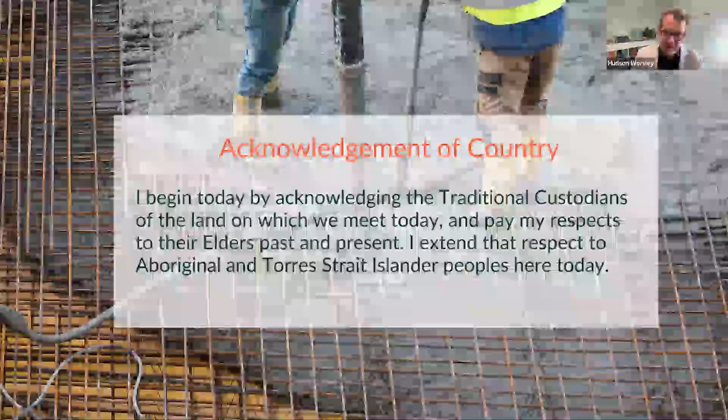And thank you to the 400 odd registrations who expressed interest in this. Clearly, this is a document that is being well received and will be read with great interest. As chair, our secretariat has already heard from the ACT government saying, hey, can we apply this tool? Can we use it? The Victorian government, their transport people, are also giving the thumbs up saying this is very timely, very useful, and there's a lot of interest from local government as well. So really thrilled that the MECLA collaborative model is delivering.

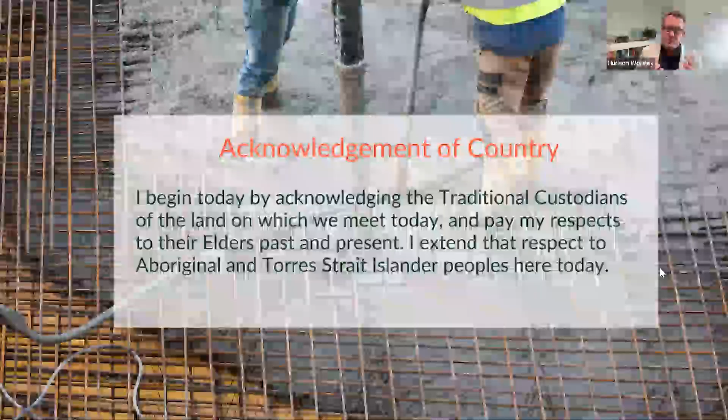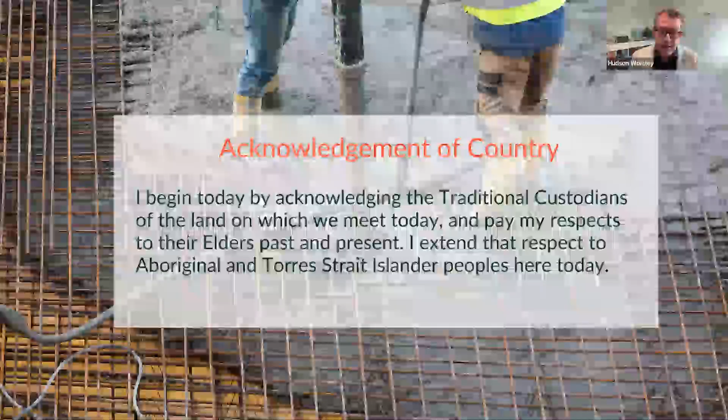Now, as always, MECLA operates in a pre-competitive space. The ACCC has recently put out a consultation paper talking about collaboration for sustainability. The key point being we mustn't engage in any anti-competitive behaviours. So I point that out at the start of every event. It's so important. But the common good, the public interest that we are seeking to achieve, I think is writ large here. So please keep that in mind.

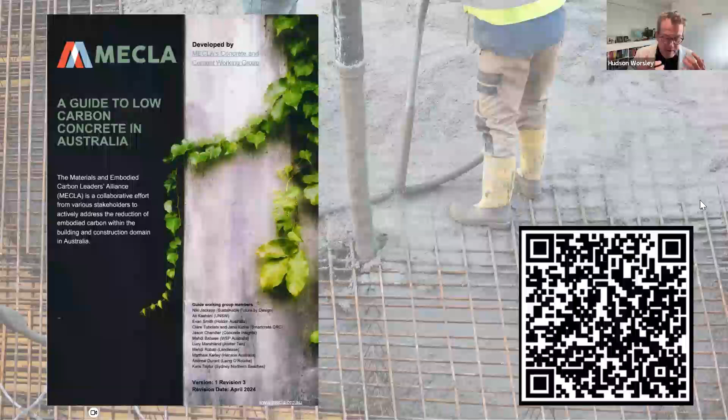We have Evan Smith, who will take us through the guide. He comes from a concrete supplier, but he's working with Ali Kashani, a researcher from UNSW. Nikki Jackson, I asked him how best to describe him. He just said, look, I'm a concrete dude. I'll let him explain that, but really he's a specialist consultant with a lot of industry experience. We have Claire Tubelet from the Smartcrete CRC, so talking industry collaboration there. And then Mehdi Robati from the contractor side, from Lendlease. So we have all parts of the value chain for this topic contributing to this fantastic paper.

Just before we go into it, I really want to zoom out a little bit on the context, and why we're having this conversation, why MECLA is here as well. So, the construction sector has a clear mandate. By 2050, we need to be carbon neutral. And by 2030, we need to have at least a 40% reduction in the embodied carbon of construction materials as well.

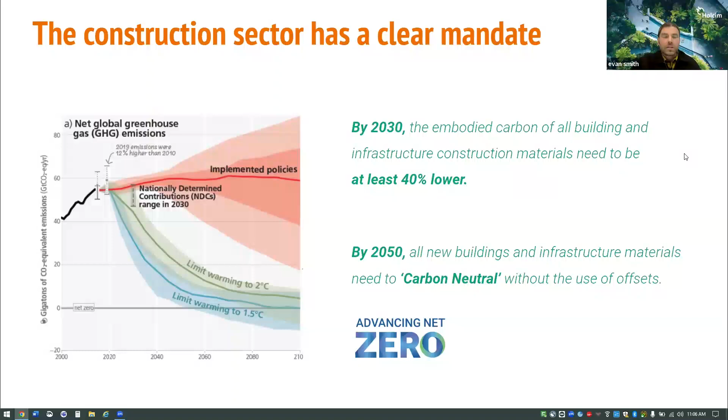So the primary emissions is from the cement. For a general cement, it might be 80 to 90% of the global warming emissions actually coming from that 11% as well. So you can use industrial byproducts and alternative materials to reduce that. So byproducts from power stations, so fly ash, byproducts from steelworks, slag, silica fume from silicon manufacturing as well. And there's a number of other SCMs that the industry is looking to use as well.

Gravel, the impact from the aggregates can be reduced by using recycled aggregates coming back from the construction demolition materials as well. Sand, natural sand can actually be replaced by manufactured sand. So it's a byproduct from the quarrying activity, some of the finer materials from crushing the coarse aggregates as well.

And also water. The environmental impact can be reduced with the water by actually using recycled water. So it's quite common practice as well that a lot of the concrete batching plants actually capture the wash water from hosing the yards and the trucks and the washout, and they actually reuse it into the concrete as well. So all those things can come together to reducing the embodied carbon of concrete.

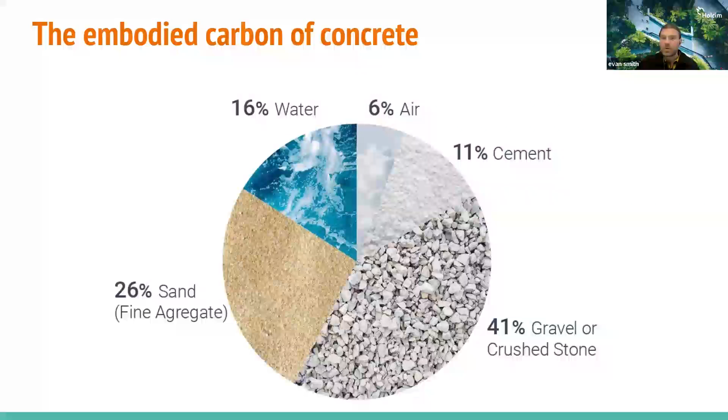So I guess why is it important to use a life cycle assessment? So life cycle assessments and environmental product declarations really look at the entire impact of a product as well. Like I like to say, all the way from it coming out of the ground through the extraction, like every single material that goes into the concrete that I showed you in the last slide, all the way through as it goes through to the life cycle of the product as well.

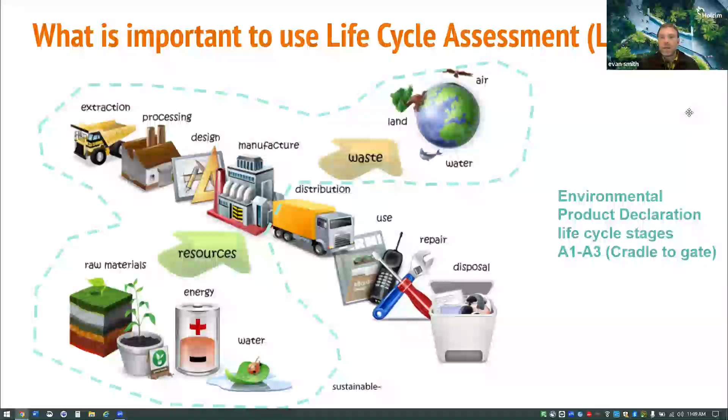So quite comprehensive. EPDs are done to international life cycle standard product category rules, and they're third-party verified, and they're all publicly available as well. So really the gold standard in life cycle assessment as well.

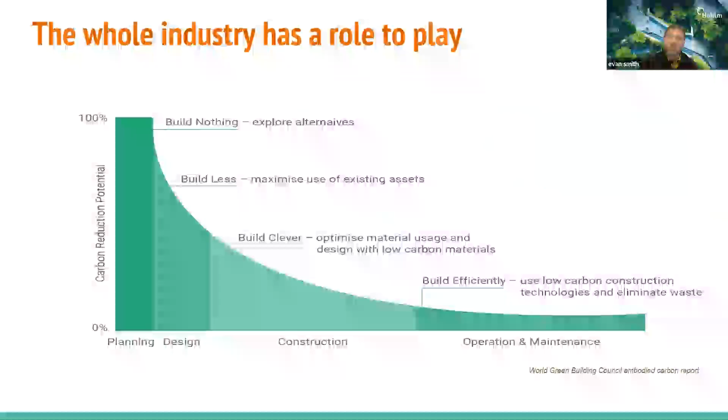The whole industry has a role to play in decarbonisation. Also, the greatest opportunities are at the start of the supply chain when it's thought about up front. Like government setting targets, clients being aware of embodied carbon, setting specification requirements, so through the design phase and then through the construction phase. As you move along, your opportunity to reduce embodied carbon is diminished. So it's very important to think about it up front and as a whole of the supply chain process as well.

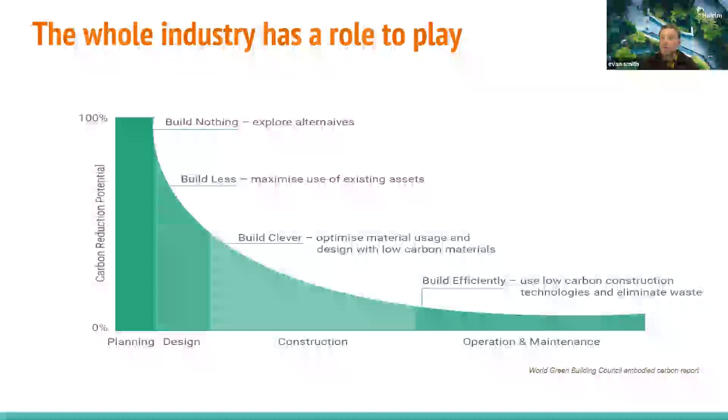For concrete, I guess, there'd be 20 people all the way from the government setting targets and clients, all the way through to the procurement people, all the way through to the concrete manufacturers that are batching the concrete as well. So everyone along that supply chain has a role to play as well.

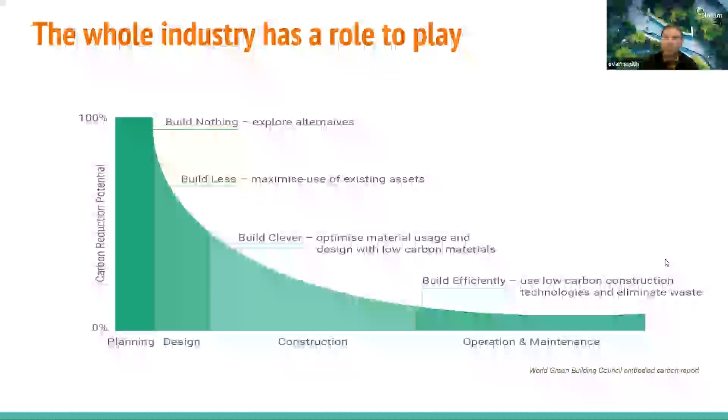Just a little bit about MECLA. So I think MECLA is great because it actually has that whole entire supply chain. It's not just the cement manufacturer and the concrete manufacturer working on it. It actually incorporates design efficiency we need to look at, the specifications. It's a wicked complex challenge. So that's why it's so great having everyone along the supply chain being involved in MECLA as well.

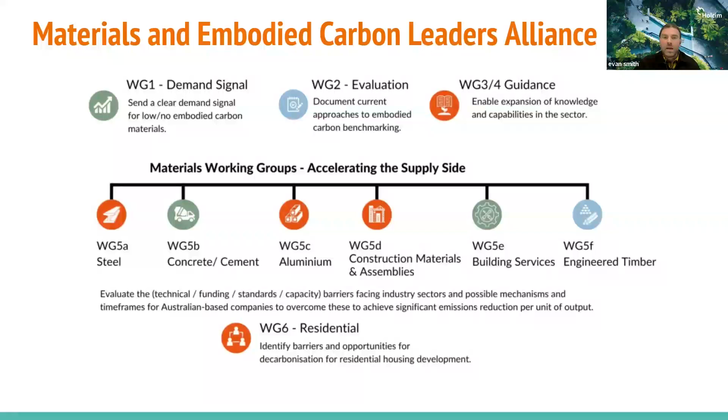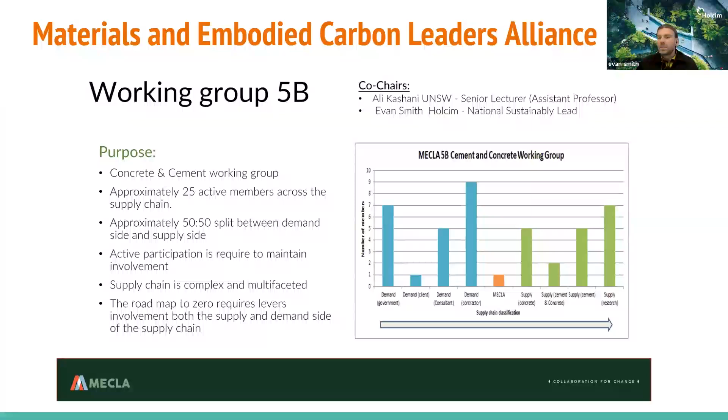So for people that don't know about MECLA, hopefully you'd all be aware by now, but there's a number of working groups, and I'm from the concrete and cement working group, along with Ali and Nikki and some of the other people you'll hear from shortly in the panel discussion as well. So for our working group, approximately 25 active members for each meeting. We meet every month as well. And as you can see, that's a bit of a mock-up of the membership and where they sit in the supply chain. So we've got members from government, client, contractor, all the way through to the suppliers, and then also to the R&D and CRC as well.

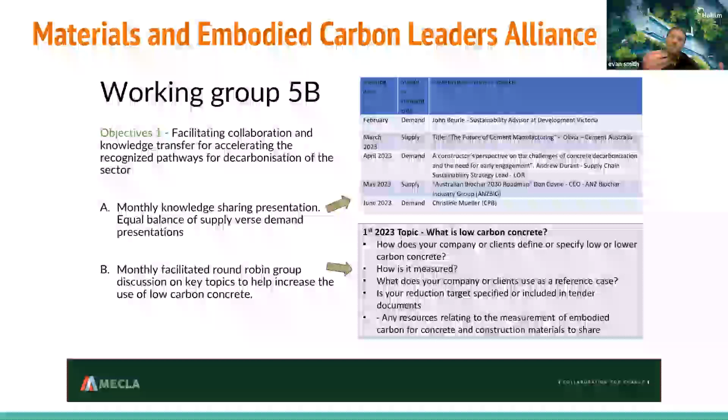So great makeup. We've got two objectives that we've been working on as well. The first objective is actually monthly knowledge sharing. So we actually do alternating presentations from the demand side and the supply side, and try to engage all the members in the working group as well. So that's just a snapshot of some of the ones that we had last year.

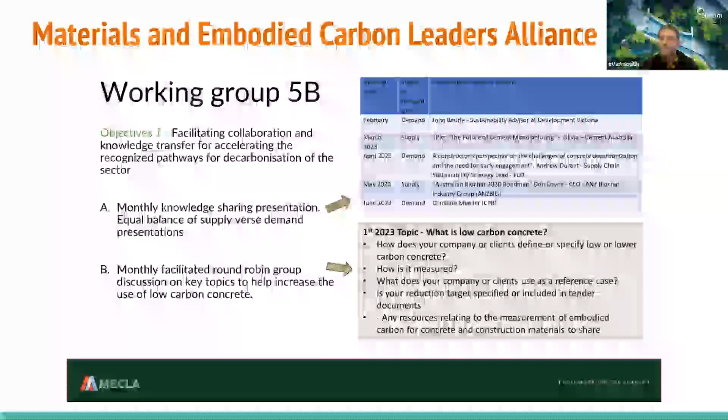And then in addition, we've been having facilitated group discussions as well. So kicking off, I think it was start of last year in Feb 2023, we had the group discussion about, well, what is low carbon concrete to you? How is your company or clients currently defining or specifying it? How are they measuring it? What are they using as a reference case? What are they using in tender documents as well, and any other resources that you're aware of that you'd like to share? There's so much happening in this space as well.

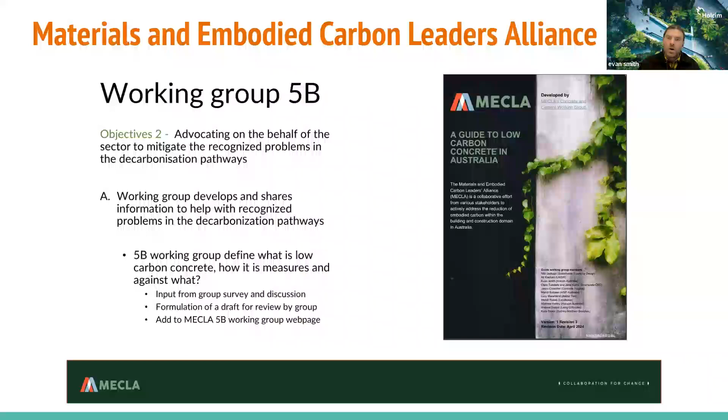And then that transitioned on to the second objective, advocating on behalf of the sector for decarbonisation. So that then transitioned into a sub-working group from our one, looking at defining and working on a guide for low carbon concretes, which is why we're here today. So the low carbon concrete guide subgroup has approximately 12 members. So far, we've been meeting monthly. There have been 10 meetings. So a lot of work and a lot of discussions have gone into it. And as you can see, it's everyone from across the supply chain as well.

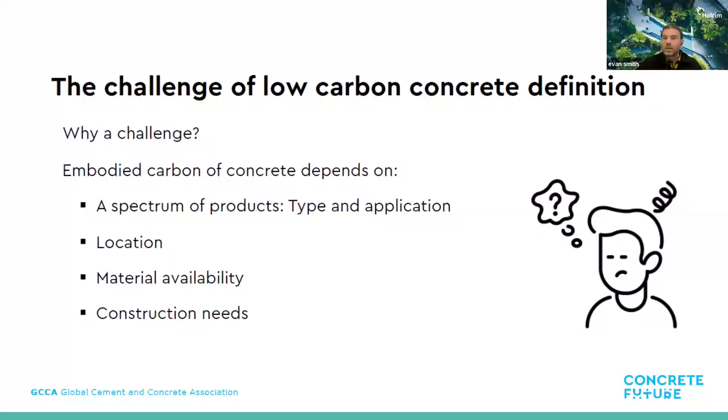So the challenge is low carbon concrete. How can you define it? The carbon intensity of concrete depends on where you are, the application you're using it for, the type, the strength, the material availability, and the construction needs. If you're in precast concrete, it's completely different from footpaths, about what is actually challenging, what is low carbon for that use. Or in WA, what's a low carbon concrete for burnished floors compared to Queensland, where we might have different availability of materials. So quite complex, a lot of discussions.

We've got a lot of really knowledgeable concrete practitioners in as well. So the initial discussions were more like, how can we make it perfect and accurate? So it's more on the right-hand side. So this really helped us. This is from the Global Cement and Concrete Association. This slide came across, and it really helped us try to find our center. We had a lot of discussions and we're like, well, where is this falling in?

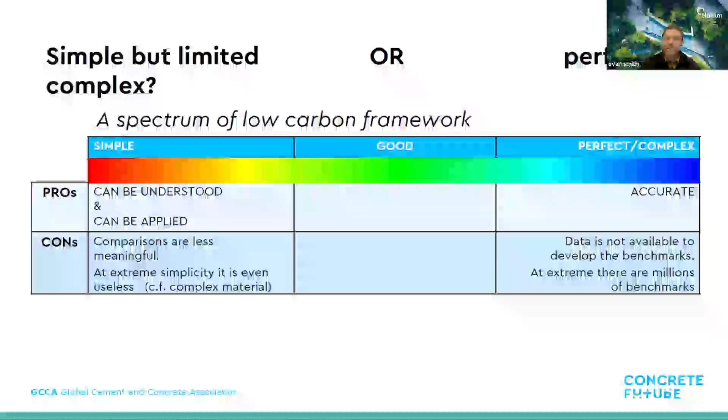Is it too simplistic at one end, where it can be easily understood, but it could be meaningless and useless? And then on the other end is perfection and accuracy, but at the extreme end, it can be millions of different benchmarks for different applications and locations. So we're trying to center ourselves on, is this good? That's what we're aiming for, middle of the road, not to seek perfection or oversimplify it.

So that led us to the proposed approach for the guide. Through the survey as well, we decided we wanted it to be Australia-wide initially. So that set the precedent. Australia-wide, we wanted it to be broadly for all stakeholders: architects, designers, engineers, researchers, and users. So that whole spectrum of thinking. And then to look at existing approaches around the world, what they've done, and learn and leapfrog along.

We knew it was going to be the first iteration. We had to start somewhere. And as I said before, we knew it wasn't going to be perfect, but we wanted it to be definitely useful.

We had a lot of discussion. A lot of concrete practitioners might know there's normal class concretes and there's special class concretes. The special class might be 50% of the concretes used in Australia, but there are so many different types of uses of them, like post-tension, precast, burnish, and they're all completely different. They're not comparable. But there is also normal class concrete, which is strength at 28 days as well, and is fairly comparable in the strength grades.

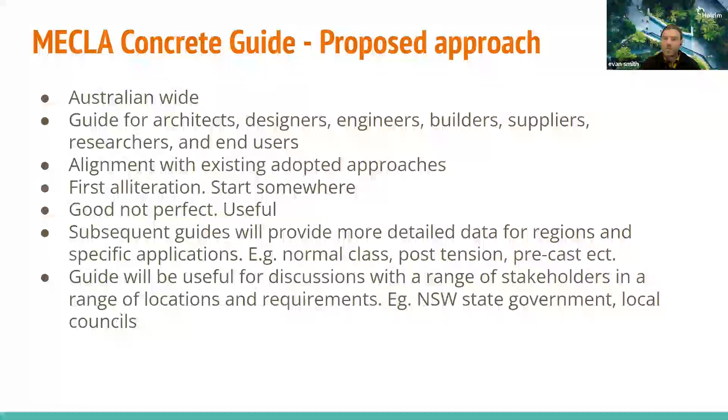So we had a discussion: should we split that out? But then we returned to center. For some users and architects, they might not even know what type of concrete they're going to use yet. So let's try to include all of them, but note that caveat as well. We also want it to be useful for a range of stakeholders.

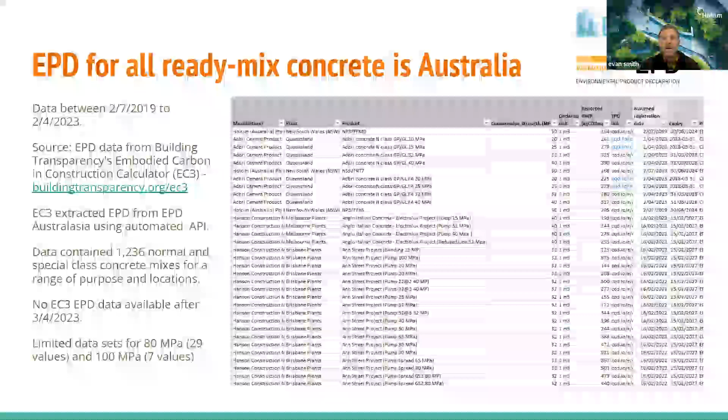So we were able to get our hands on some of the EPD data that I mentioned before. It's all publicly available. Initially, we started off opening up the EPDs and getting the numbers for all the normal class concretes. But when we decided to expand to the special class concretes, there were just too many to really keep up. I work in the area, and I still don't know what the lowest carbon concrete is and the numbers, because there's just so many. You have to open up the PDF, look at them, and transcribe it down. So we've got a lot of people around Australia looking at that as well.

For the resources, we actually had a connection through Lendlease. It's one of the members of EC3. It's an online database, and they've been using an API to mine EPD data around the world. So we were able to get our hands on that as well. That contained over 1,200 normal and special class mixes for ready mix concrete in Australia.

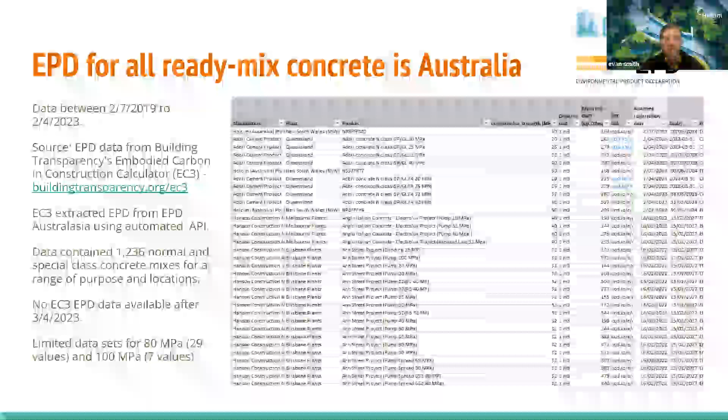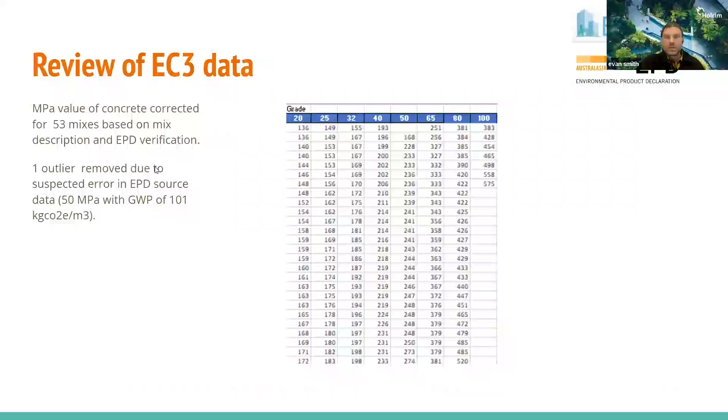I won't go through all of the detail, but initially when we looked at the data, there were some things going on. So there was a process to go through and clean up the data, because an API had been used to mine it. There were some issues with some of the strength classifications, and also some minor errors that we picked up as we went through. That led us on to having the data set. Then we were able to graph that out statistically. So we had a data set. Okay, well, what do we do with this data set?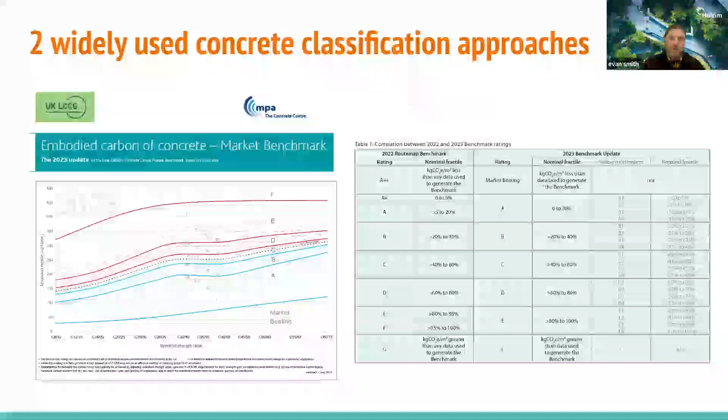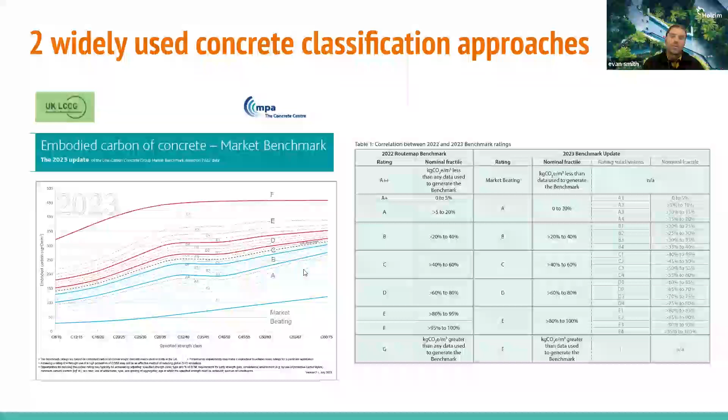So then we cast our eye out to what's happening internationally. Some of the leaders in classification systems are all looking at actual data. There's two in the UK. The Low Carbon Concrete Group from the industry over there took an approach where they had all the data from the industry and looked at dividing it up into 20% chunks. So an A might be best in class, the top 20%, and C is your medium one. They were looking to update that every year. So if you bought A concrete, you always knew it was the top 20% in the UK for all types of concrete.

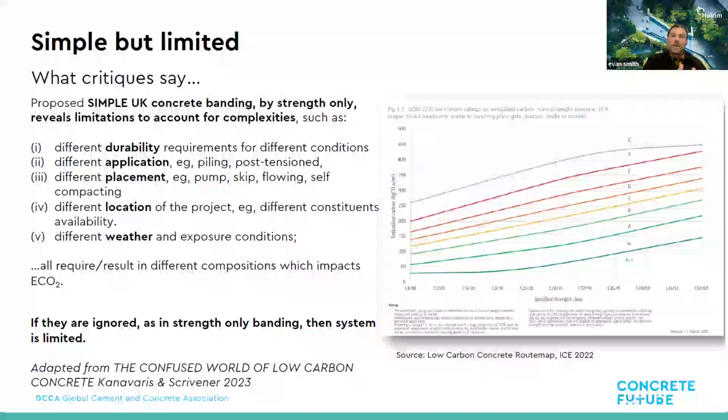There are some issues with that approach, some of which I mentioned before about durability and application; it all differs depending on what you can actually do with the concrete and what level of reduction. For example, in piling you can do a lot. Typically a low heat concrete has a lower embodied carbon, but say building post-tension has a higher impact. So it doesn't really look at the actual uses and the differences.

There's another approach in the UK, from Arup, that looks to build upon that. Rather than having A's and benchmarks that moved over time depending on what was available, they looked at having a fixed baseline. So A is zero emissions, that's where we're aiming to be.

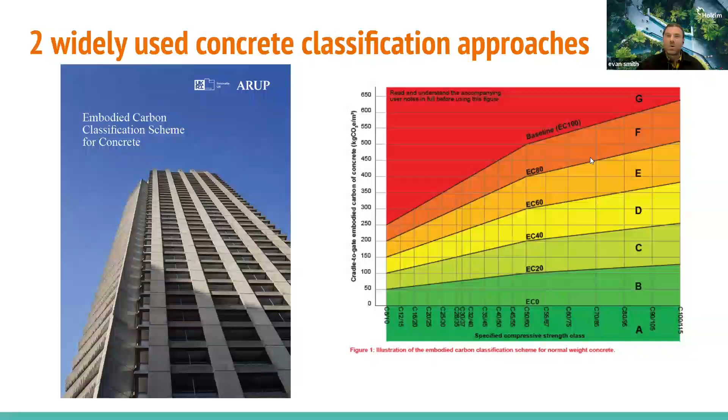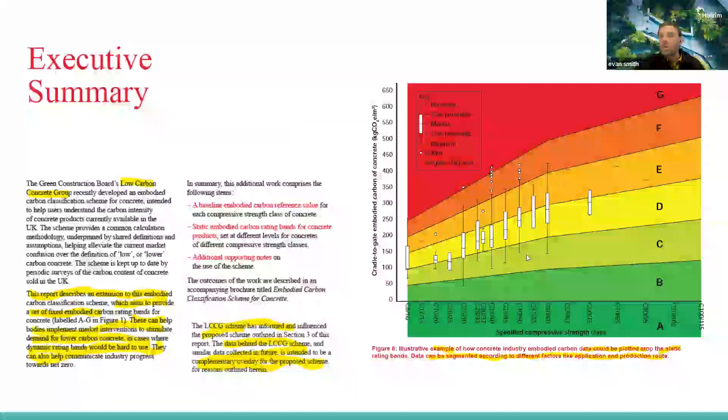G is the worst in class that's available there as well. And they just had 20% blocks going down from that for a bit of a classification. And then you apply your data set over the top of that, depending on what data set you're looking at. So this might be all the concretes, or this might be particularly just post-tension. So you have a look at it and, okay, well, what is available? Okay, best in class at the moment is maybe a C. So it's as simple as that.

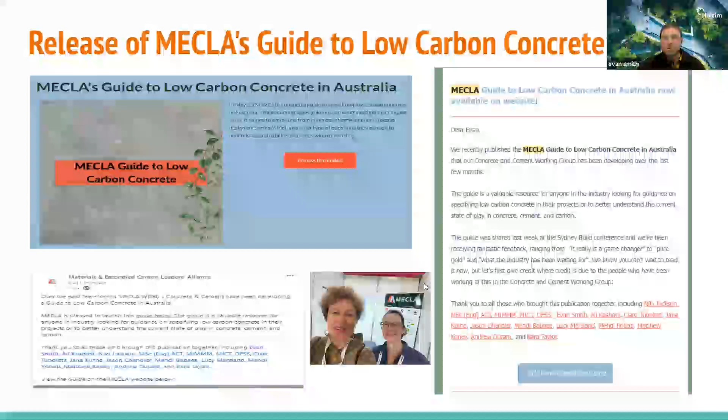So then moving on to the actual release of it. So we took all that. The guide was released in May this year. And since then, we've been going through a process of consultation. We've been receiving some good feedback, as Hudson mentioned. So I'll quickly take you through the guide. I think we've got maybe 5-10 minutes left, so I'll quickly go through that and we'll go into the panel discussion.

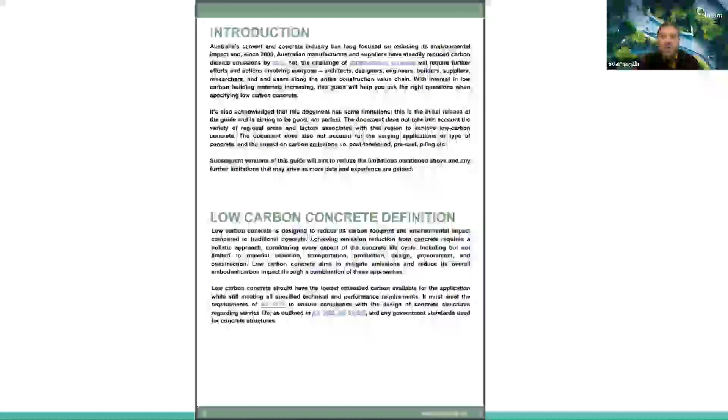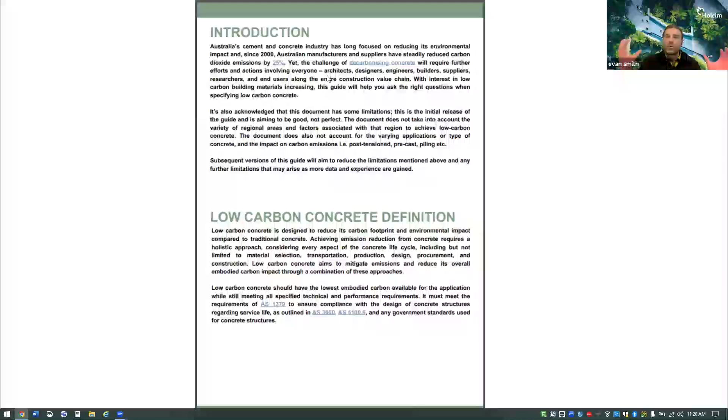So just to cover it, a brief introduction and some links to some great resources that are available. There has been a lot done in the sector in Australia. So there's some links through to the sector's decarbonisation plan, and also the acknowledgement of the limitations of the guide. It's not perfect, it's a start, and it's going to be an iterative process. And also that it takes all concrete together. It doesn't account for different variations and applications.

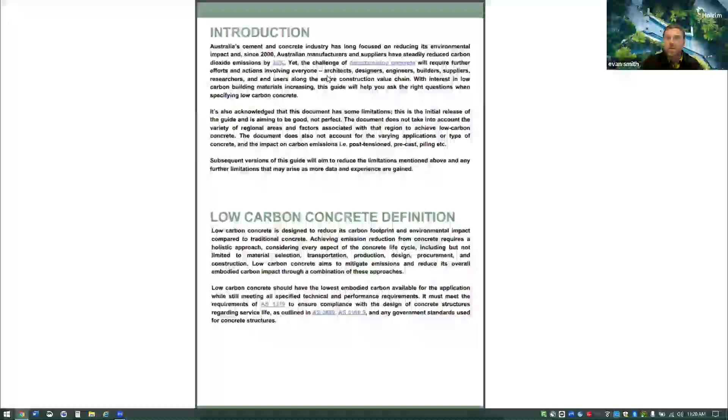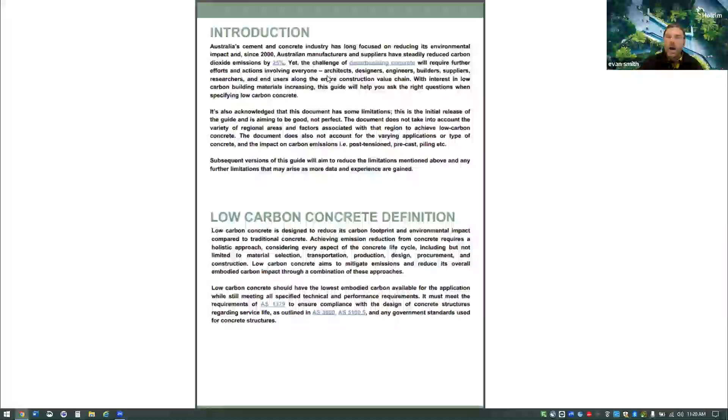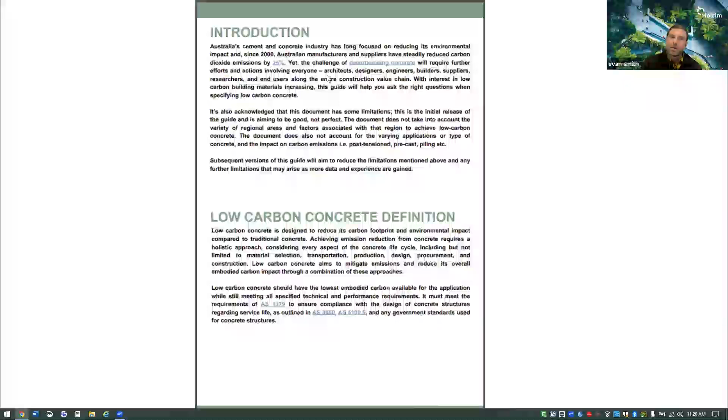We had a crack at a definition for low carbon concrete, taking all those things into consideration that we just went through: low carbon concrete should be the lowest carbon concrete available for that specific application, but still meeting all technical and performance requirements required by the concrete, and meeting the Australian standards, which are important for durability and other requirements. So really working within the bounds of the current concrete, but for each of the applications, low carbon concrete should be the lowest available for that application. That should be the aim.

Some general instructions for use. So, main thing is starting at the start, specifying that you need a low carbon concrete. That's often just enough to trigger the process. If that comes through in a specification, the concrete company will say, okay, we want a low carbon concrete, and they'll match that up and provide it. And as I said before, request a low carbon concrete, but it still needs to meet all the other technical requirements, like shrinkage or slump or any other specifications. This is just an additional performance requirement, for the first time actually saying, hey, we want a lower carbon concrete for that application, and putting that as a performance requirement, just like anything else.

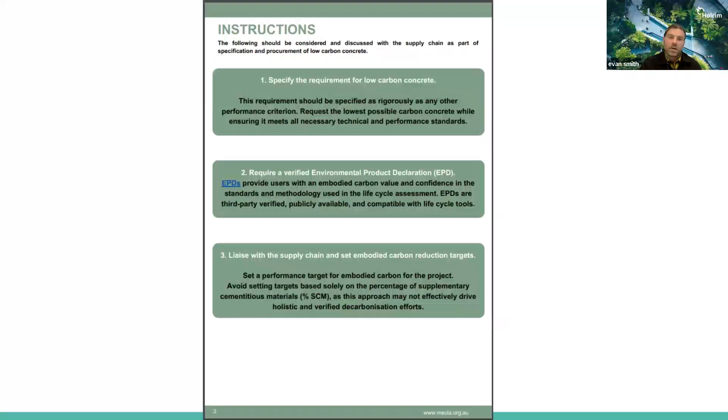Requiring an EPD, so the EPDs ensure that the entire life cycle assessment is looked at. There's a lot of developments now happening in the supply chain for decarbonising, and not all cements are the same. The supplementary cementitious materials have different material impacts. Transportation, admixtures, they all go into the mix as well. So it's important you look at the entire life cycle, and it's credible, third-party verified data. And then the third one is to liaise with the supply chain and set embodied carbon targets, and avoid setting targets based on percentage of SCM, because there's some issues with that, which we probably don't have time to go into today.

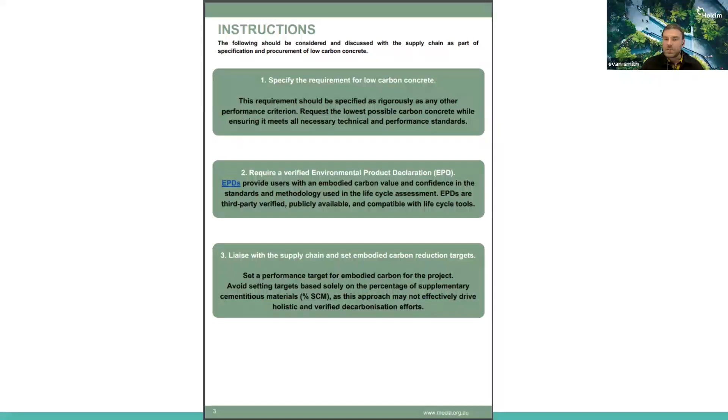Moving through, so 5 considerations. These are things that come up a lot in terms of questions, and then some broad principles as well. The aim is for these to be useful for everyone along the supply chain. So the number one thing: have you engaged with the supply chain? Early engagement with the supply chain helps decarbonisation of concrete. There's a great guide in there from the Green Building Council of Australia, the Practical Guide to Upfront Carbon Reduction. It has all the different stakeholders and what you can do in relation to embodied carbon, what you should be thinking about.

The number one question that normally comes up is, what is the cost of low carbon concrete? There are some links in there to some MECLA spotlight events as well, where people talk about low carbon concrete, but generally, like all things, if it's thought about upfront and early, the cost can be comparable and insignificant in the wider context of the project. However, the opportunity, as we said, gets less and less as you move along the project life cycle stages.

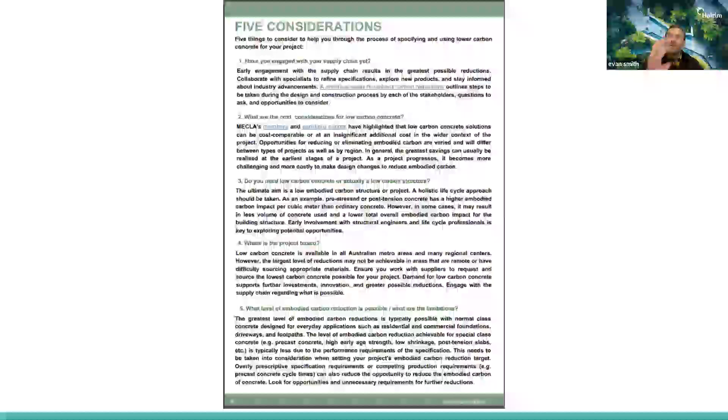Do you need low carbon concrete? Actually, a low carbon structure. The aim is obviously low carbon infrastructure and buildings and total life cycle thinking. So there's no use using low carbon concrete if you use twice as much of it as you needed. And just to open people's minds as well, it's about the entire life cycle assessment. Sometimes you can use a potentially higher impact product, and if you can use less of it, you can potentially achieve a greater reduction overall for the project. So really think outside the box.

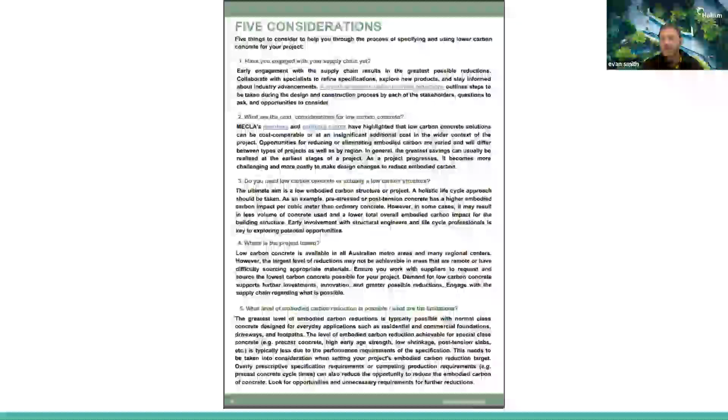The next question is normally, well, I'm in a regional location, what's available? So we try to land on that as well. Low carbon concrete is available in most metro and many regional locations. Start by asking for it and engage with the supply chain. This drives demand. We've had some situations where, due to demand, additional silos were installed, and then you can have further reductions available in that location.

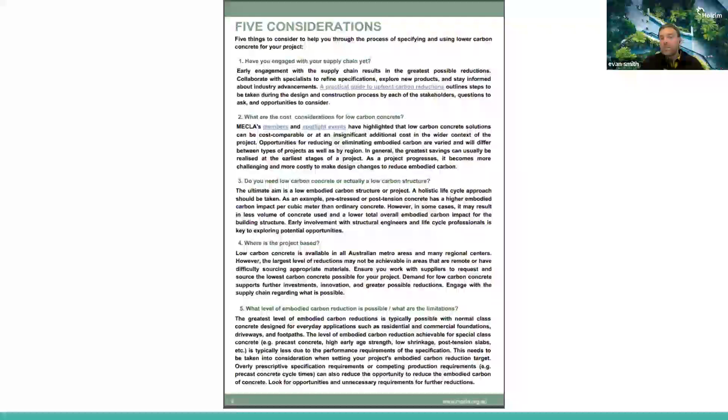And then the next question is normally, what level of embodied carbon reduction is possible, and what are the limitations? Generally, normal class concretes have the largest level of reductions, and special class concretes could have less due to their performance requirements. But it really depends on the application and where you are. One of the important things to note is that overly prescriptive specification requirements can limit the level of reduction, such as overly ambitious cycle times or other performance requirements.

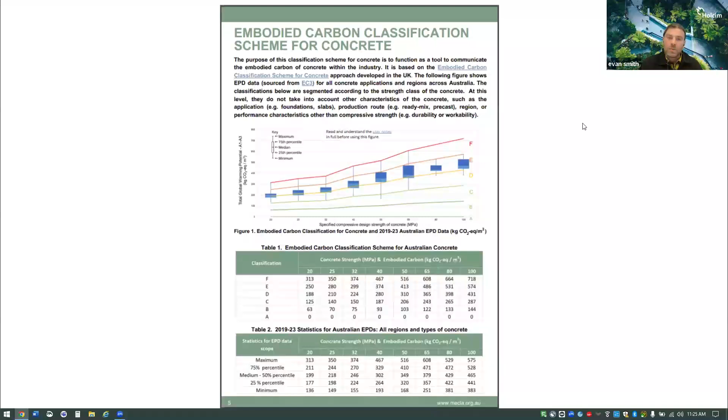And then moving on to the final page, this is where it all comes together. This is a graph of the data that we got from EC3. It's all the EPD data available for ready-mix concrete in Australia, broken down by strength grades. At the top, the red line is worst in class, the highest impact by an EPD in Australia. The bottom of the box and whisker is the lowest available, and in the middle is the median, so that's the 50th percentile.

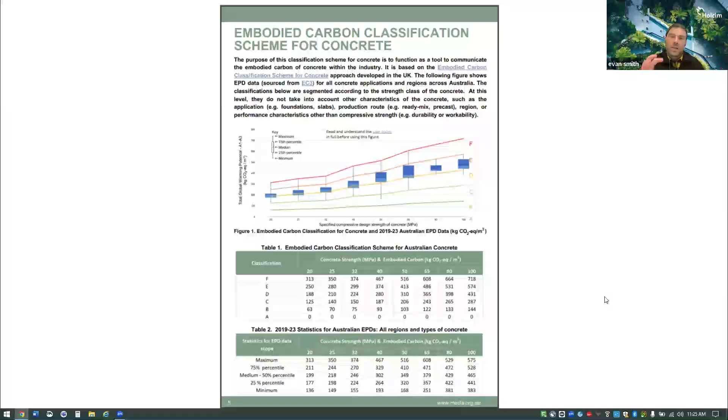So for the first time you can see, and I think this is really powerful, accurate measurement and data, and knowledge is power. For the first time you can see where we're actually at in terms of the lowest carbon concrete for a 50 MPa. I've got this EPD number for it; how does it compare to what's available? Noting that it's all across Australia for all different types of applications, but for the first time you've got that power, and that's just going to grow as more and more EPDs come to market. And then the tables go through that data as well.

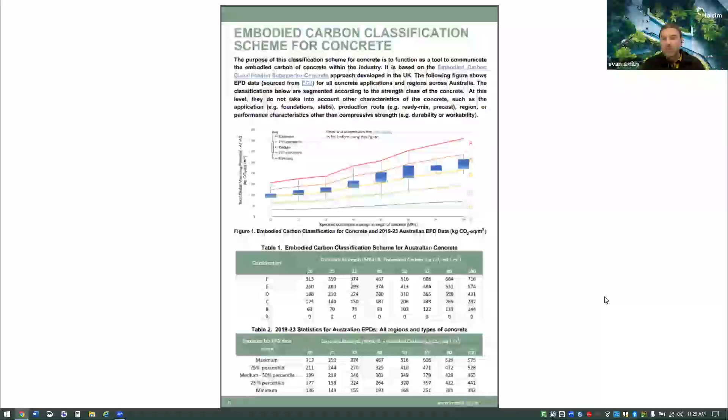So what's aligned for, say, the 50th percentile, so then you can start using some of the numbers that you have from EPDs and ask, how does that compare to the median or the max or the min?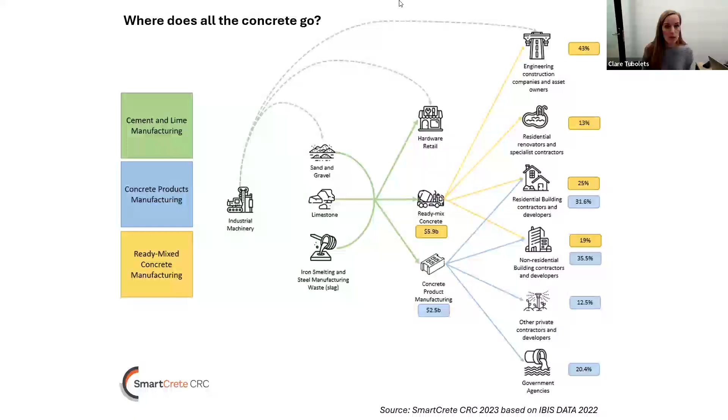Thank you, Clare. It's a really great question. Where does all the concrete go? 29 million tonnes of the stuff. We're talking big numbers there. So that's fantastic.

I'll throw a question to you from the chat, maybe for different perspectives across the group here. What targets are best? Is the direct global warming potential target appropriate? And can the market respond to that efficiently? That's from David Law. Who wants to answer that one? Yeah, I might kick it off. I'm sure Nikki's got some thoughts on it.

In the guide, we didn't say anything specific. There's a lot of numbers in there, but we didn't actually define it due to the complexity of all the different uses as well. So I think it's about a process of going through and looking at the concretes that you are using and seeing if you can go lower carbon. That's why it's important to specify it up front: we want the lowest carbon concrete available for our application.

But the EPDs do work in absolute numbers. There are different reference cases for different projects. If you're a Green Star project, they specify what reference case they want used. For infrastructure projects, obviously they've got lots of different types. So depending on what you're looking at, there are different things to compare it to.

But the number one thing is EPD numbers are absolute, so you can always work in absolutes, and that's what we've also seen Laing O'Rourke do as well: setting, this is our absolute limit for maximum, this is our ambition for low carbon concrete. So the EPD numbers don't change.